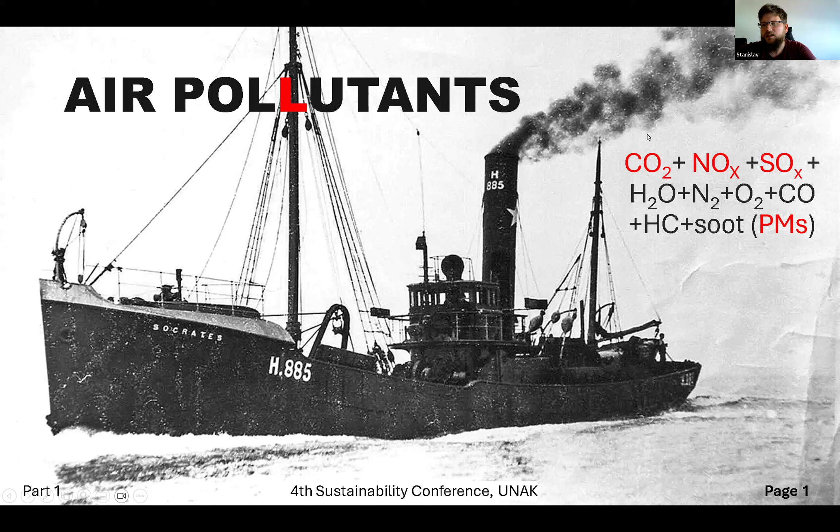So the main problem that we are having nowadays is still more or less the same as it was at the beginning of the era of combustion engines. Most of the maritime industry is still dependent on combustion engines which are working on fossil fuel technologies. Okay, maybe now the fumes and exhausts are not so black and dirty, but the chemical components are still the same, among which the most dangerous, which we are going to talk about, are CO2, nitrogen oxides, sulfur oxides, and particulate matters.

Hopefully, there is an international organization called the International Maritime Organization, acting on behalf of the United Nations, which protects us through different regulations, studies, and research with a goal to conserve and sustainably use the oceans. In Iceland, the Icelandic Transport Authority and Icelandic Environmental Agency are responsible for implementing what comes from the International Maritime Organization. And one form of action from IMO is that IMO makes conventions based on research. And in those conventions, there are regulations.

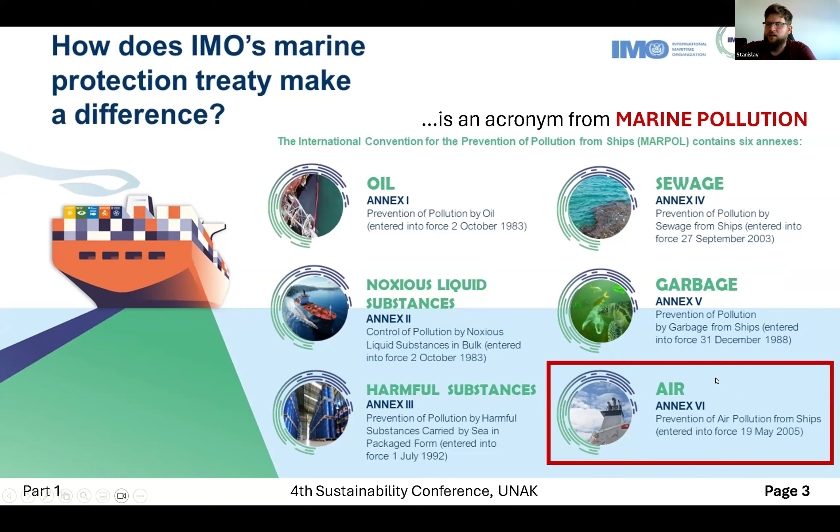And our particular focus today is on a convention called MARPOL, Annex 6 of which deals exactly with dangerous air emissions from on board vessels. It talks about regulating them, recommending what to do, making the limits, and so on. The main thing is that it talks about different emission types. We are not going to focus on specific equipment emissions or specific types of vessels which produce specific emissions.

The interesting thing is also that the very well-known CO2 is almost completely not applicable to fishing vessels today, except some operational documents. The most focus is brought onto nitrogen oxides, sulfur oxides, and particulate matters. So why does this happen? Why is the very much hyped CO2 not targeted? And should we do it? Let's try to answer this question. Let's look at the picture in general, and especially for Iceland.

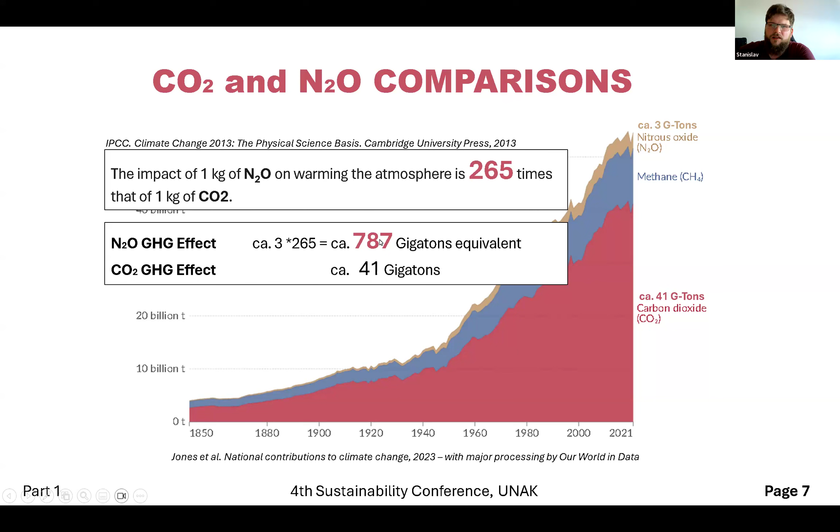Moreover, why maybe is CO2 not treated so much, at least for fishing vessels? You can see this terribly big amount of totally artificially emitted CO2, which is 41 gigatons in 2021. And you can see just 3 gigatons of nitrogen, N2O. But according to respected researchers, the impact on the greenhouse effect from N2O is 265 times higher than the same amount of CO2. So even with the fact that you emit just 3 gigatons, the effect is 20 times more than CO2. And having in mind this percentage, that's what we have to treat.

And that's what IMO is dealing with, presenting regulations globally and for some specific areas, regulations for sulfur oxides and for nitrogen oxides. And here you can sleep quite well because these emissions are treated and constantly reduced, and countries representing most of the tonnage of the fishing vessels in the world accepted this.

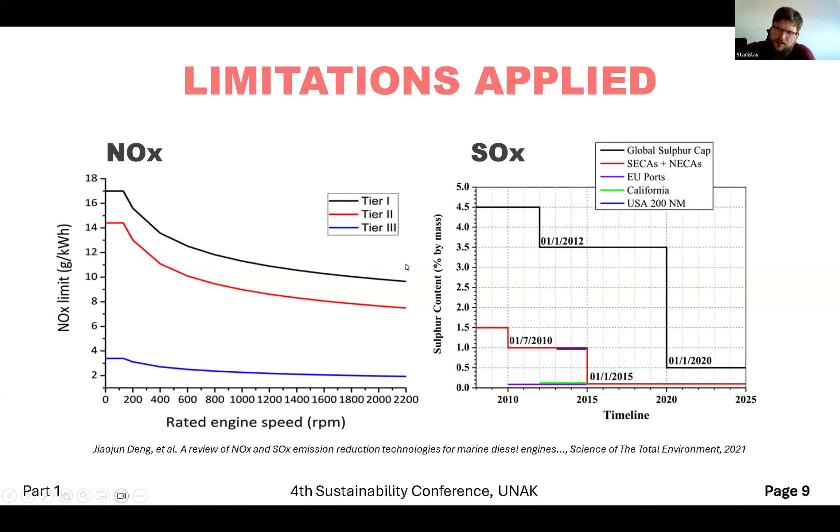So the future looks bright, but we want to be completely emission-free. And there are technologies for helping us to reach these levels nowadays and further on. And those technologies could be divided into three different directions.

First, it's some kind of technical upgrades, a piece of equipment that you put and it cleans your exhausts, for example. The other option is you optimize your performance, you optimize your design, you optimize your energy management and your operations. And the third direction is when you introduce some alternative sources of energy or alternative fuels.

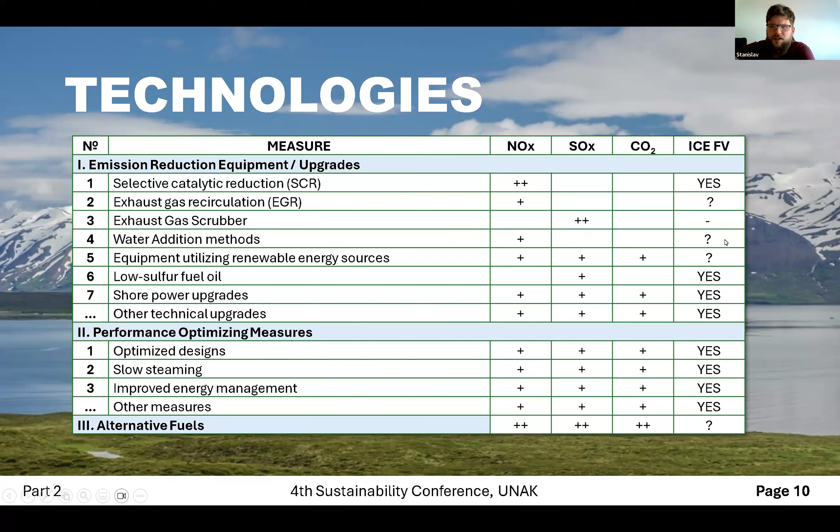Some of those items are applicable to fishing vessels, some not, some are rational, reasonable, some are not feasible or economically not interesting. When we do our designs, we try to use everything that is reasonably good for our customers.

Fishing ship owners are also quite practical guys, and they are not going to pay for something which is not fully proven and which is not obligatory or not giving them direct benefits. So you have to have this specific thing in mind.

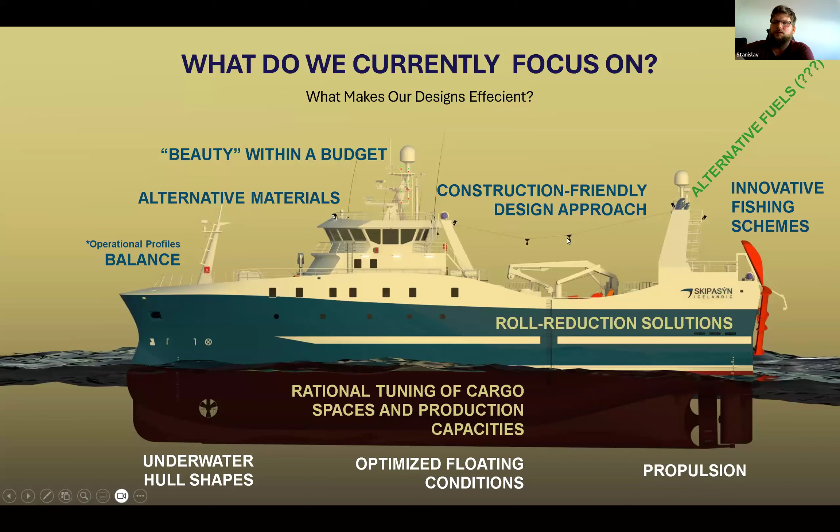But nevertheless, if you want to optimize something, you should understand the benchmark, the foundation. What are you going to optimize? And we are optimizing with those different measures the energy demand and the amount of emissions. So to do it, we need to understand first how much energy our vessel needs.

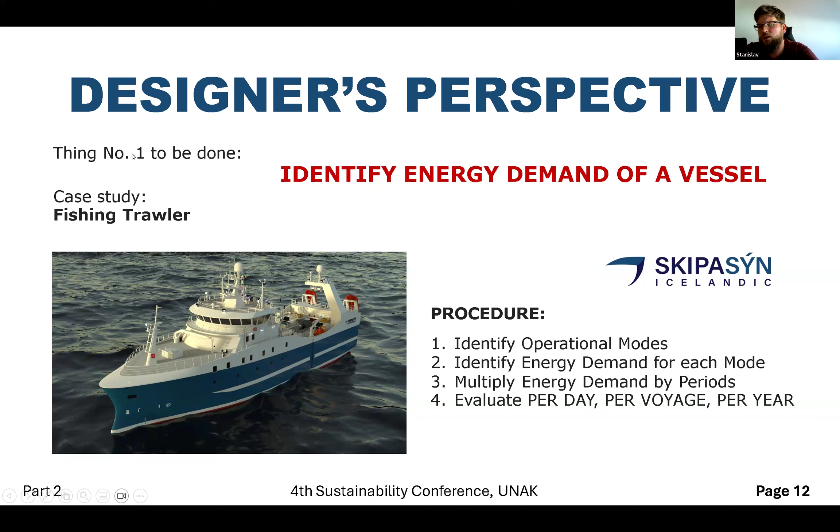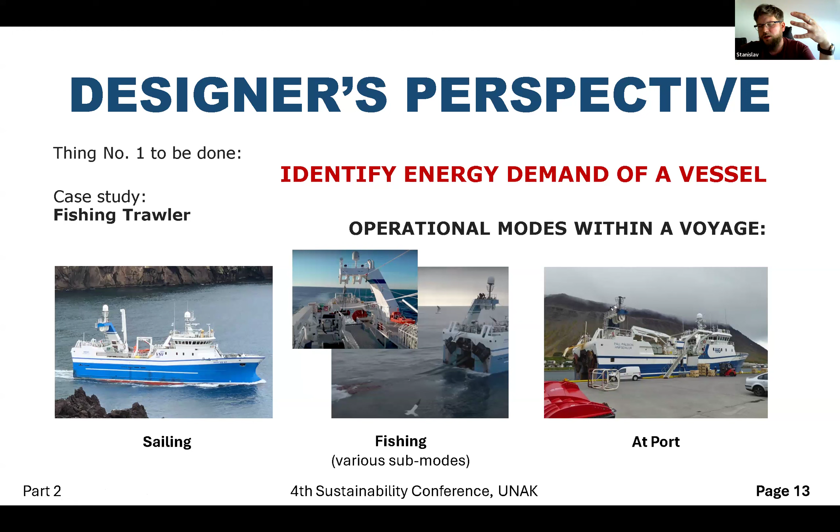So in this case study here, we are talking about a freezer trawler of around 60 meters. And for understanding how much energy is needed, we first divide its operation within a fishing trip, a fishing voyage, into different stages. Quite easy for us. Then we know all the equipment consumers. We know how they work during different stages of operations of a fishing vessel.

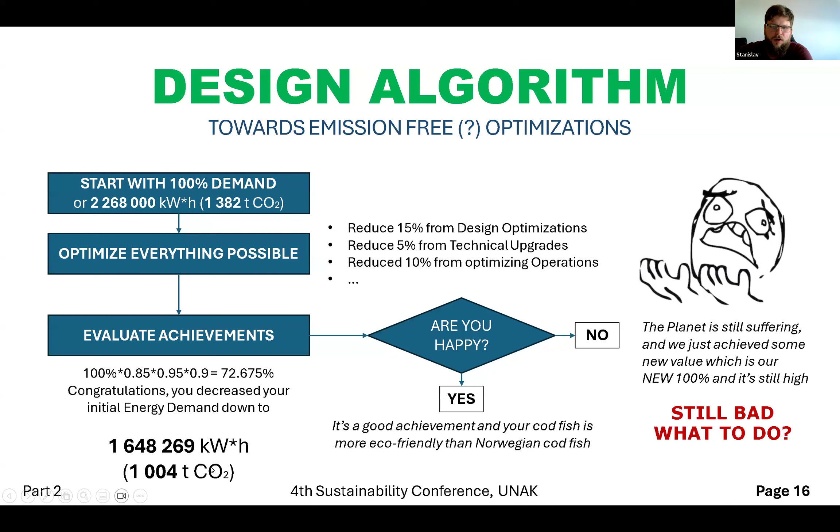As for today, we say, yes, it's a great achievement. We will market our vessel. If you buy our design, your cod would be better than the Norwegian cod. But if we speak about the future, the answer would probably be no, because this is just our new 100%, and the values of emissions are still big and they have to be eliminated.

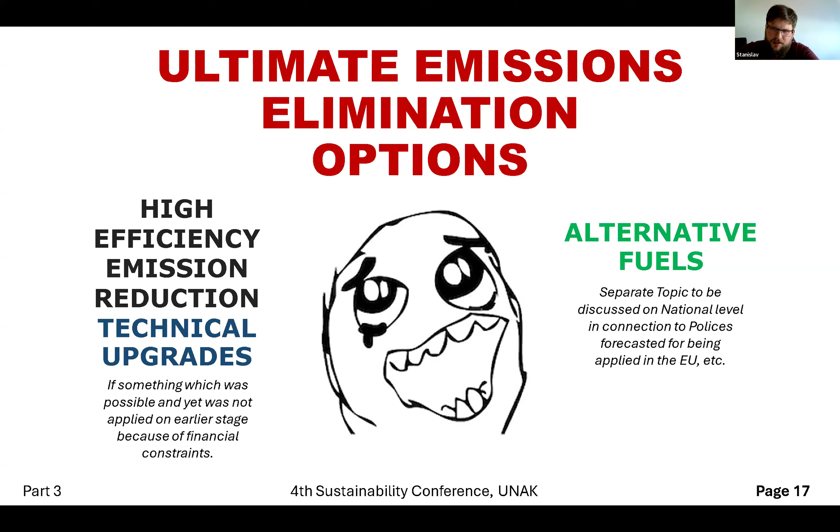So then we are coming to ultimate emission elimination options. And for some specific types of emissions, there could be some very efficient technical upgrades. Or it's even better to think about alternative fuels. And IMO also realized that. And IMO made a goal for the maritime industry to become completely carbon-free or almost emission-free by

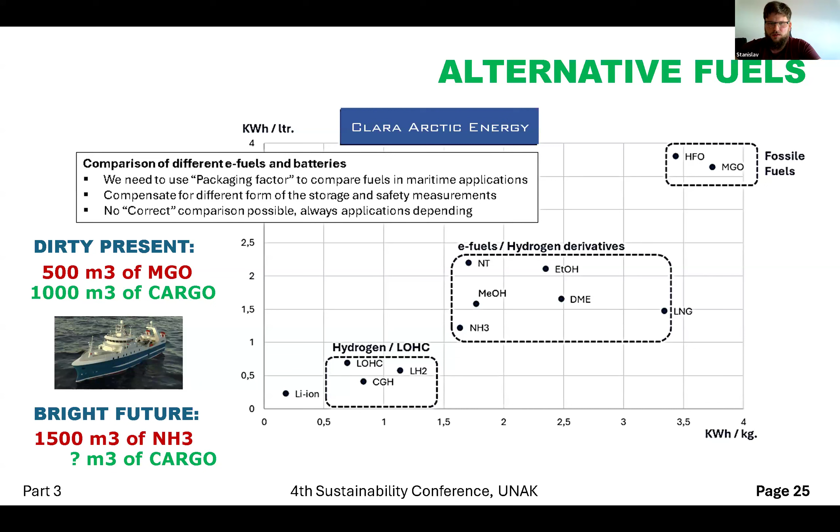While if you look at ammonia, it has a 3 times lower packaging factor, meaning that you need 3 times more space for your ammonia, which means that for our vessel you will have no cargo unless you change the design thinking and do proper research. So even if Elon Musk came to you tomorrow and spent 16 billion euros on making the whole Icelandic industry green, in the current state that may make no good change, and you understand why.

Still, we have to address the threats. We have to address health issues. We have to address negative human-driven climate change. And we have to make this move in the future because fossil fuels are going to run out. So if you want to continue living at the same and increasing standards of living, you have to go green for this or another reason.

And to do that, on the international level there are different drivers of change. They are supporting nationally and internationally. Norwegians are giving the best example, subsidizing 80% of all additional costs from introducing innovative technologies. Another driver of change is regulations and taxes. The European Union usually applies stricter law, and Iceland usually follows. So we have to make sure that a proper amount of research and innovation is tested and done, and decisions are made on the national level in Iceland, so that when a stricter tax comes, it would not be too short notice for making the changes.